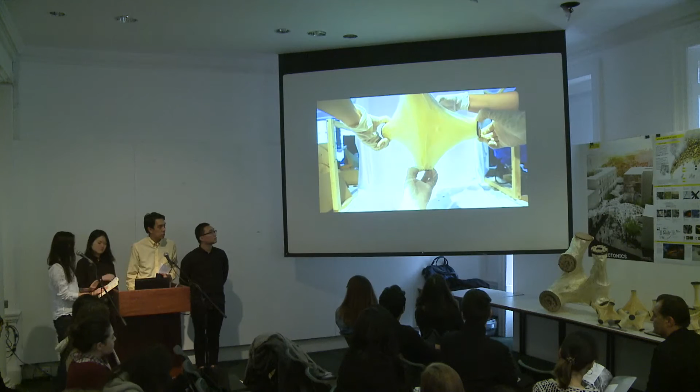In terms of the material being the design driver, we applied the material into methods for generating design through dynamic relaxation for form finding. Next, we populate the particles on the form to distribute the nodes and the positions for the connection points, resulting in a network topology.

As a thesis, how we position our research is to speculate, activate, and reinterface a prototypical urban site. The main components of the research are a rapidly deployed automated robotic production process, with the material having the properties of a performative, lightweight, and adaptable material system.

So the design process, we are also challenging the notion of translation from the digital to fabrication, whereby the input for the geometries is implicit in the material formation. Therefore, the description of the geometries of the form is directly encoded into the material.

So on the automated manufacturing process, we are employing industrial robots for the production of the material due to its high precision, its time-based formative process, and the on-site assembly process. We are making a statement of the design being in the domain of the designer, and the production being in the domain of automated manufacturing.

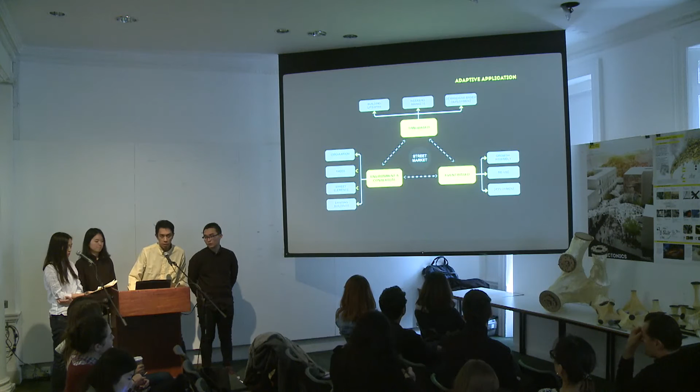manufacturing and deployment. In terms of time-based, the growth speculation of the system is integrated into the building lifespan, whereby the project is not considered a highly permanent structure, but it can be adapted to use and events.

In terms of research, historically, industrial production is driven mainly for efficiency and cost. So the historical basis for industrial production results in highly standardized production components, which results in highly standardized products.

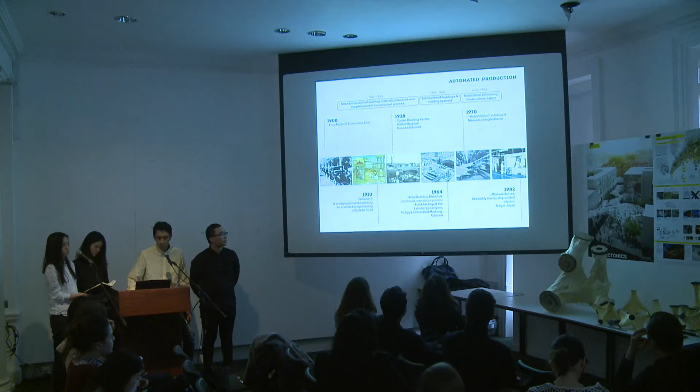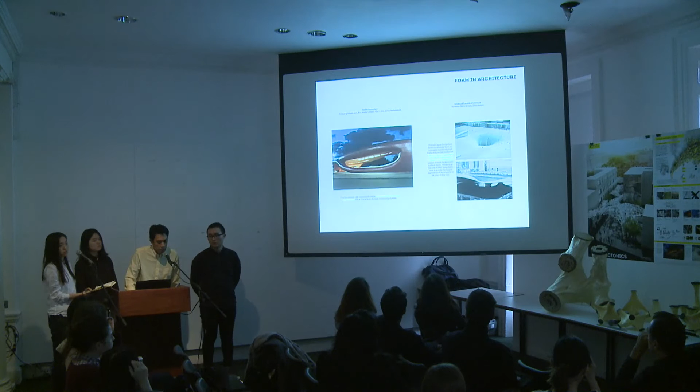Excuse me. Our research is based on Marjan Colletti's research work on foam tectonics, which we project our material processes and speculation on his research.

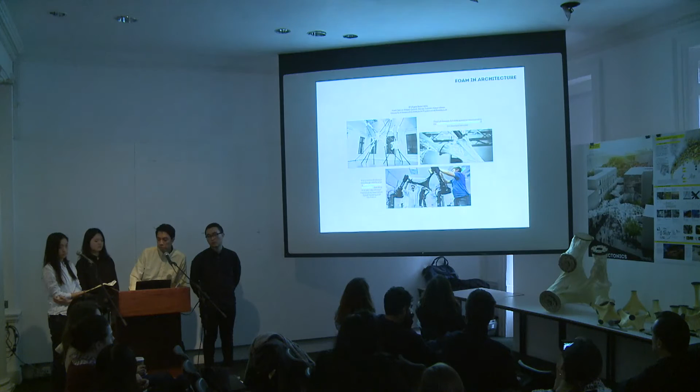So the main differences between Marjan Colletti's work and our work is we decided to pursue it further in terms of the nodal configurations in a tectonic network of structure.

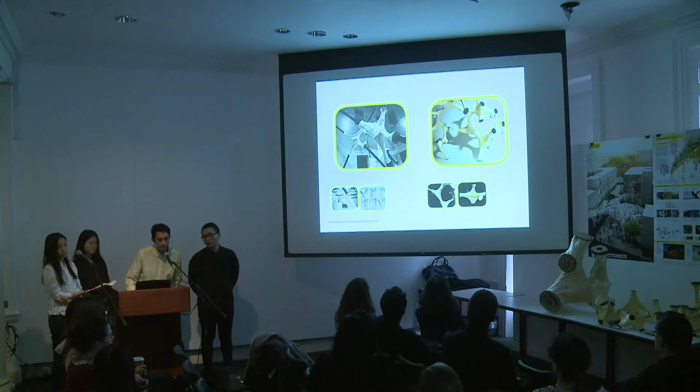Space grids and nodes are mainly used to increase the performative aspects of the structure, whereby because of the complexity of the production of the nodes, the nodes are highly standardized in the production of the components.

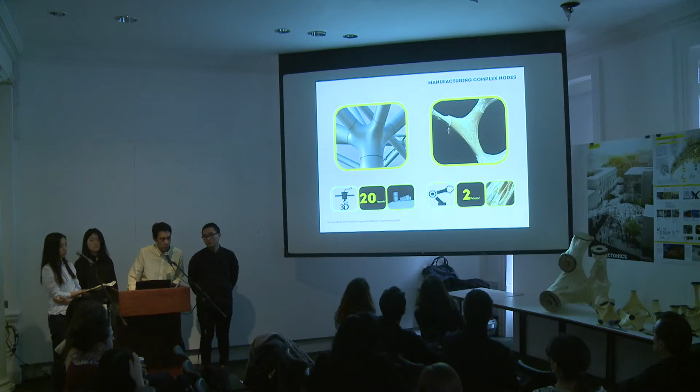This is a comparison of a production process for a complex node, whereby on the left side you can see a 3D printed node, which takes 20 hours to produce one component, compared to our material system which would take 2 hours to produce.

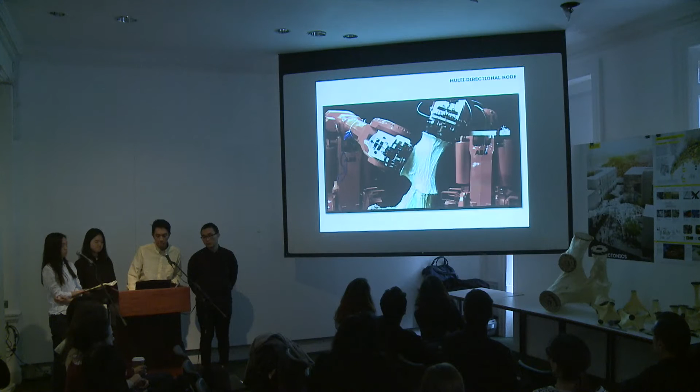This is the disadvantage. The advantage from our material is based on the phase-changing material, and it can be rapidly constructed with single elements, and it can be easily applied with the robot to produce the multi-direction node to work in a more efficient structure system. It also reduces the time and cost based on the robot production, and it works well for compression and tensile structures, creating a self-supporting structure network.

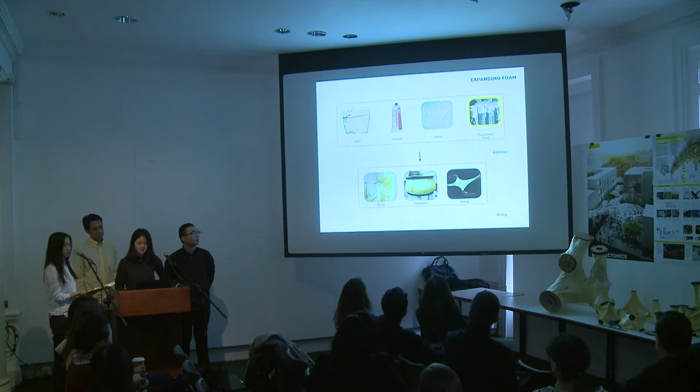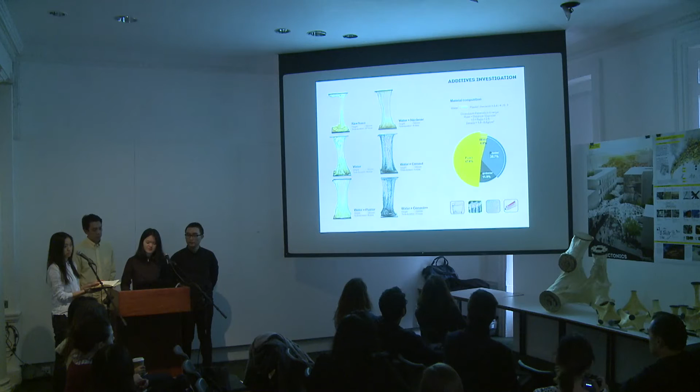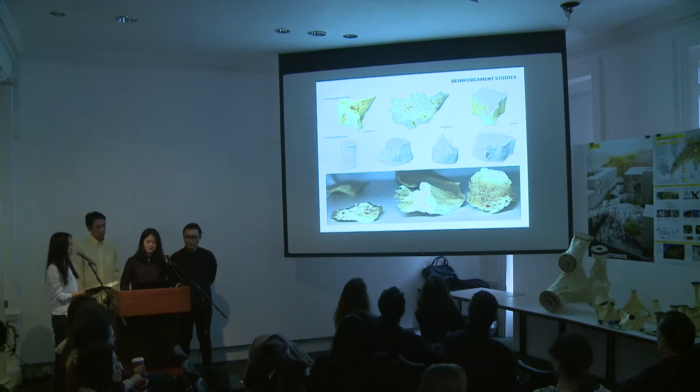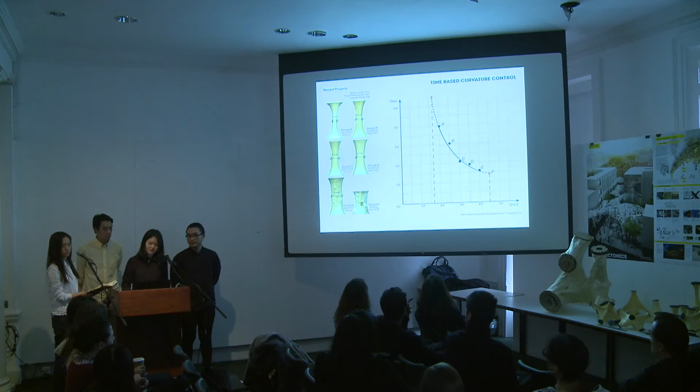It makes it stronger. This shows how time influences our material behavior. The most interesting thing we found for our material system is time-based behavior. This is the same amount of material pulled to the same height - the longer the rest time, the more strength we need to pull it. We can also get different curvatures of the elements, which we can input into our system.

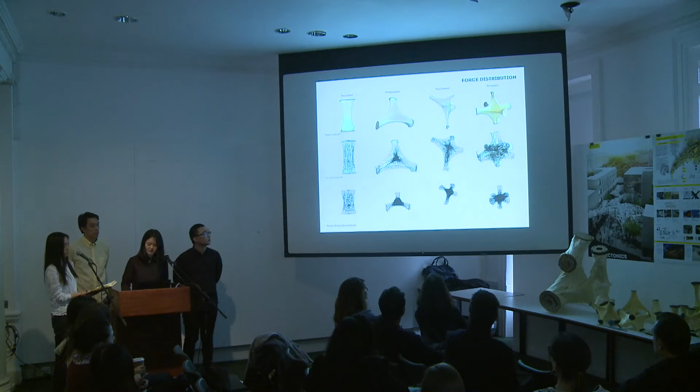These are some force distribution analyses we made for our elements. From this analysis, we can tell the more plates it's pulling, the more evenly the force distributes. These are the node reconstructions which help us calculate the material amount.

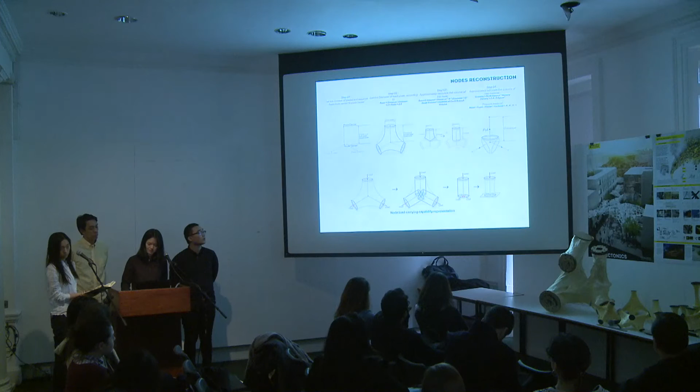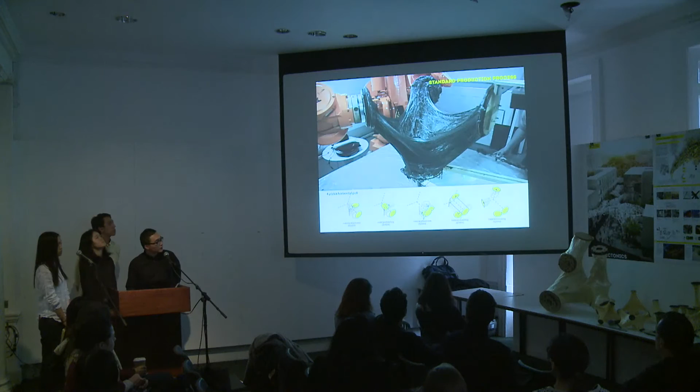So if it's too early, the material starts falling - this is a failure test. We assume that if we have more robots, we can do multi-direction pulling at the same time during the robot collaboration.

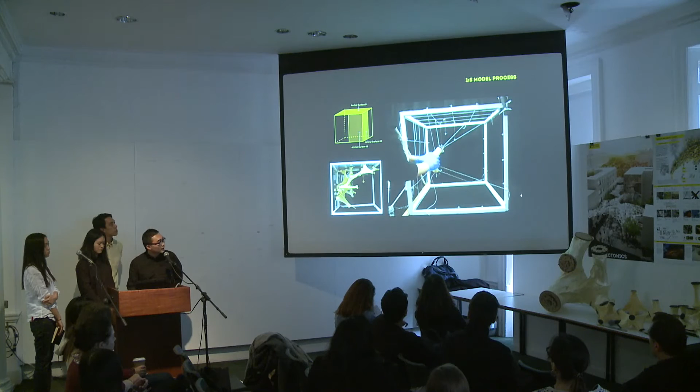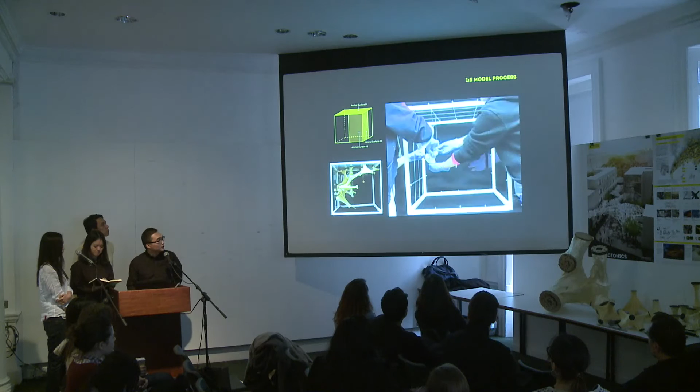This is our first step to manually figure out the production process. After pulling each element, we cut the plates, then wait for it to dry, put the material on the cutting section, and pull the next multi-direction nodes.

Following the material connecting to material, we manually control the geometry curve. This is the first time we figured out the scale of our elements with the space created by the models.

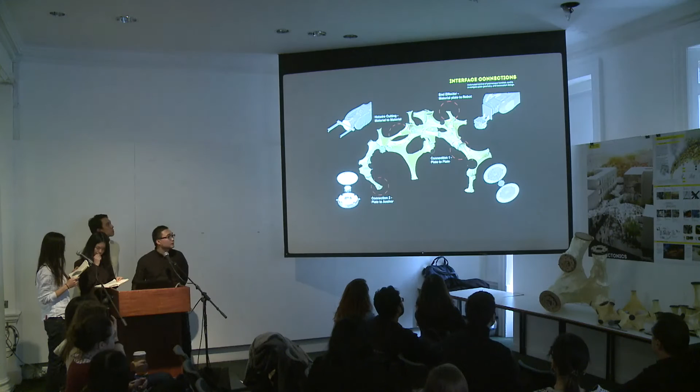For the connections of the material, there are 4 conditions: 2 are end effectors interfacing with the material plates, and 2 are anchor conditions - one on the surface and one from plate to plate. The plate-to-plate connection allows us to segment the components into assembly parts.

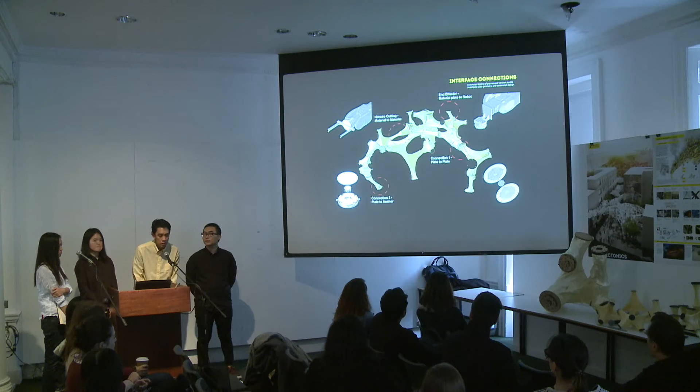This is an iteration of the end effectors, version 4. Various studies were made on the connectivity because of the goal of minimal actuation and simplified force distribution to carry out the process.

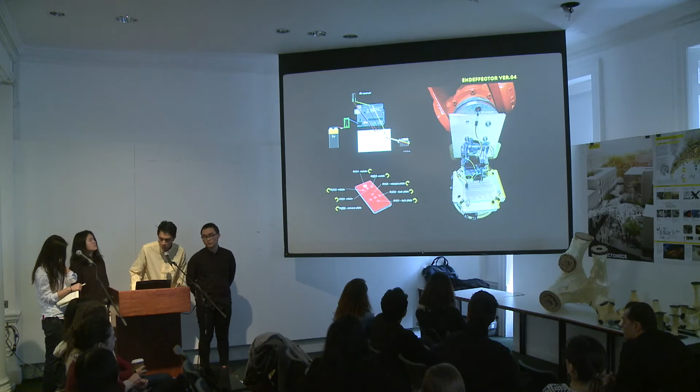This is the exploded view of the final end effector, which we used for the one-to-one prototype at RoboFold. The communication is handled by IR infrared remote control to actuate the gripping process of the material plate.

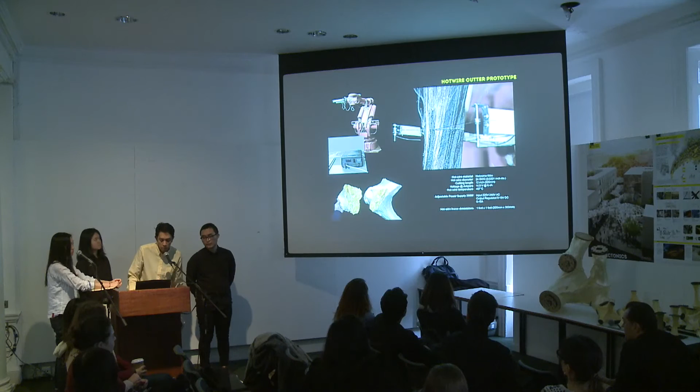For the hot wire, this is needed to accurately control the cutting locations of the material to enable material continuity and material fusion for the next element.

This is the one-to-one production of the prototype. The material burns, therefore a lot of smoke was produced. Therefore, we are arguing for a contained production cell for the robotics, and for lights-out manufacturing, whereby no humans are involved.

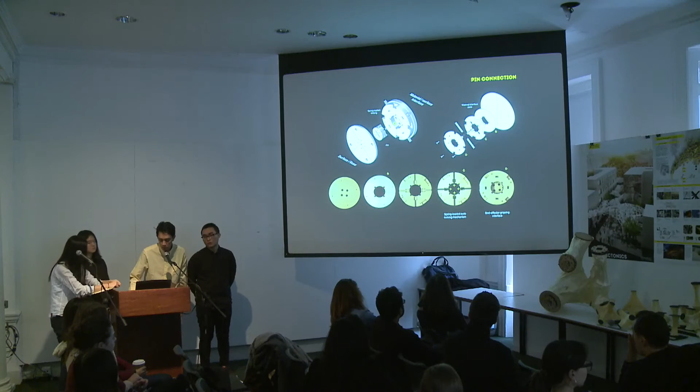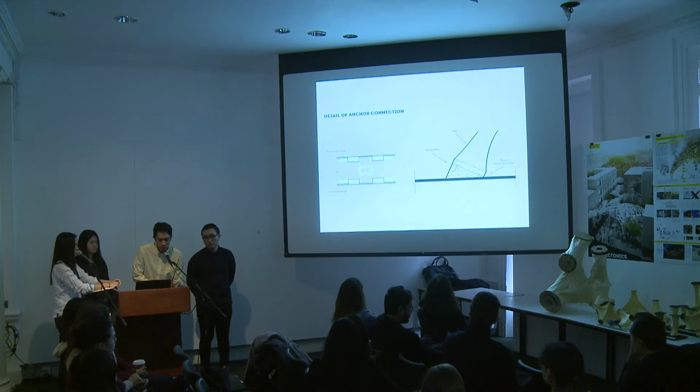This is a detail of the anchor connection at the surface. This can be applied on a vertical surface such as a wall or a horizontal surface on the ground.

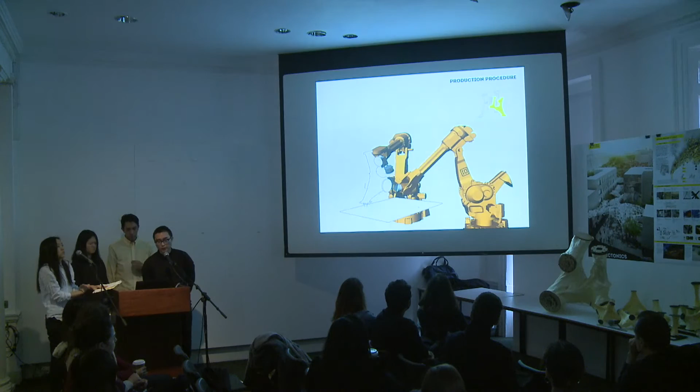This is the production procedure for the one-to-one prototype. We are trying to add complexity of the path during the material distribution to make it as automated as it can be. And then we do the cutting automated, collecting and placing automated, and pulling automated.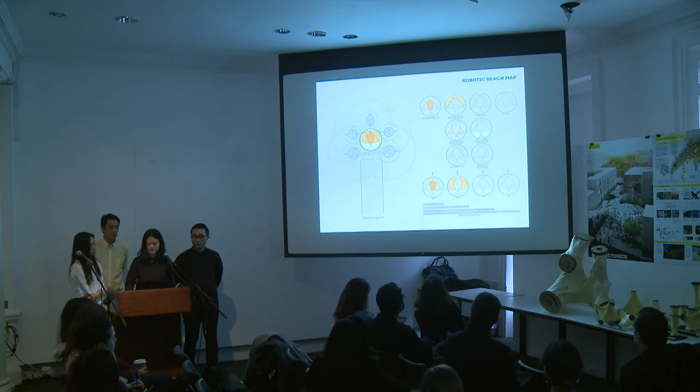This is some robotic configuration we did to figure out the robot's reach map. We found that to increase the efficiency of the robots, we can distribute different jobs on the same level because we have different numbers of plates and pulling nodes.

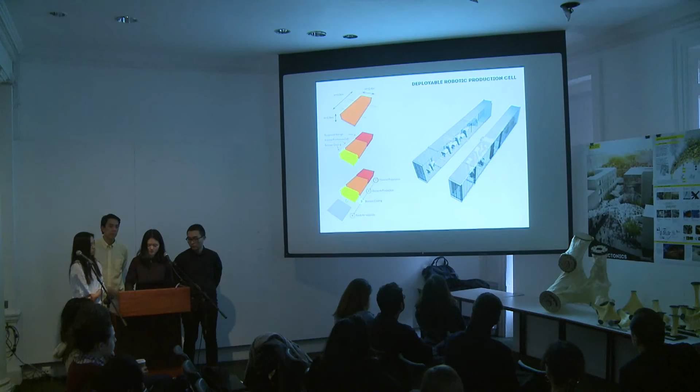This is from a container to a robot cell. One container can be separated into 3 parts: one is equipment storage, then the main part of the robotic production cell, and then the bioresin coating room. Then it will deliver to be assembled.

From our material system, our elements give certain limitations, such as angles and size. The angle between 2 branches has a reasonable range, which is within 60 degrees to 150 degrees. If the angle is too small, the fibers between 2 plates cannot be stretched fully, so it cannot give us a very natural curve.

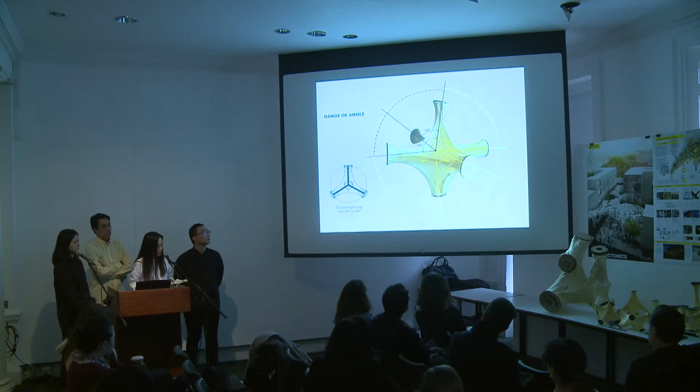Based on the angle limitations, we know when we use the maximal angle branches, we can get our maximal span geometrically. With this, the curvature is the maximal curvature we can get.

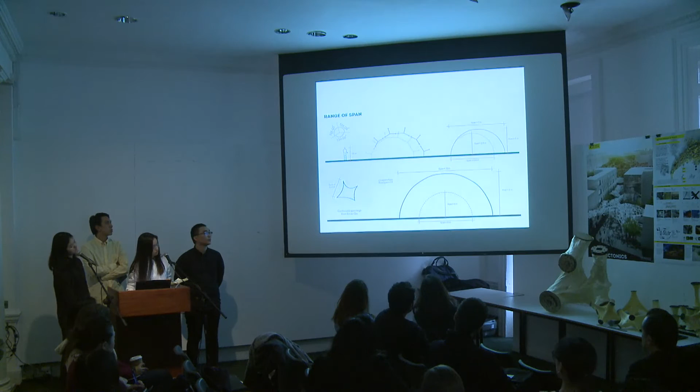Based on the experiment of our material, we know that our material is both good at compression and tension. So we use dynamic relaxation as our general form-finding method. There are all catalogs about the different set conditions.

Compared to the normal modular component system, our branches, our components, are fully differentiated. So they are based on a natural curve. They are very easy to close loops.

So these are diagrams to show different loops coming from different combinations of components. The diagrams show we introduce Voronoi logic as our method to generate our branch system, because when we populate different points, it can give us different latticing networks.

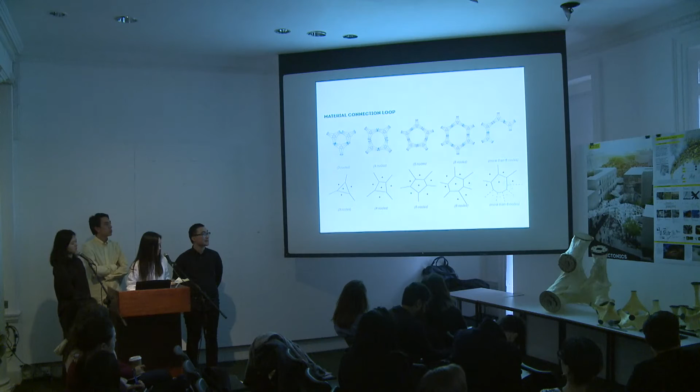Because the Voronoi can generate some very short edges, we set our rule to merge two short vertices.

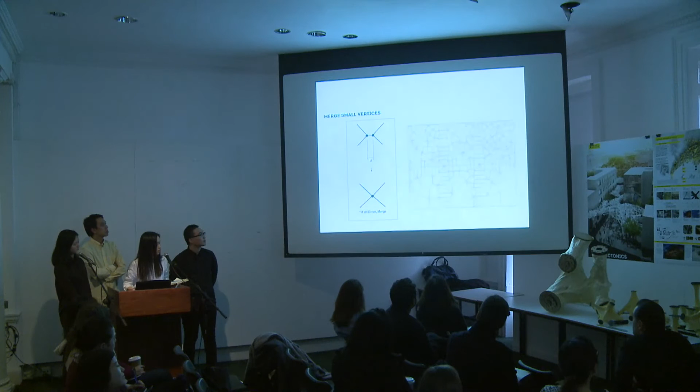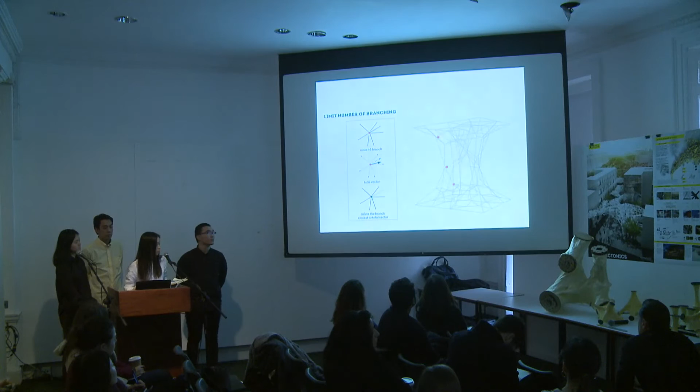From our material system, we know that the maximal number of branches is 6. This video shows how the system will try to merge the node where the branches are more than 6.

Based on the natural curvature, we define 2 kinds of curvature, which are positive and negative. For the positive curvature, we have some extra branches pop up, so we can suspend some extra external surface or membrane.

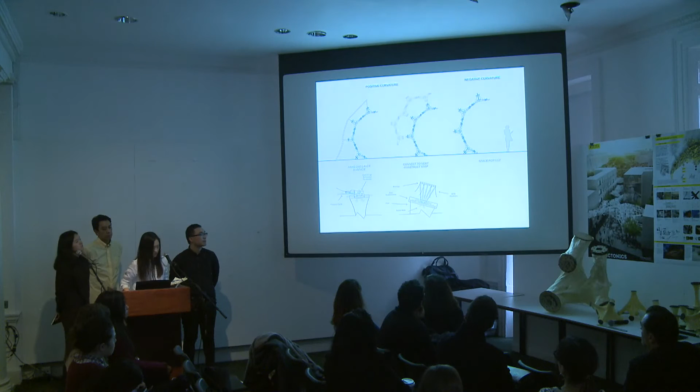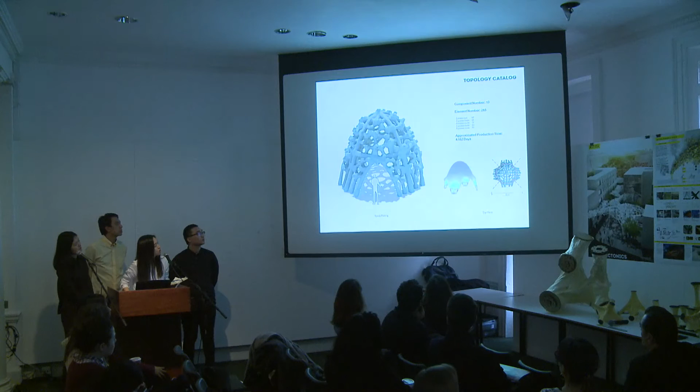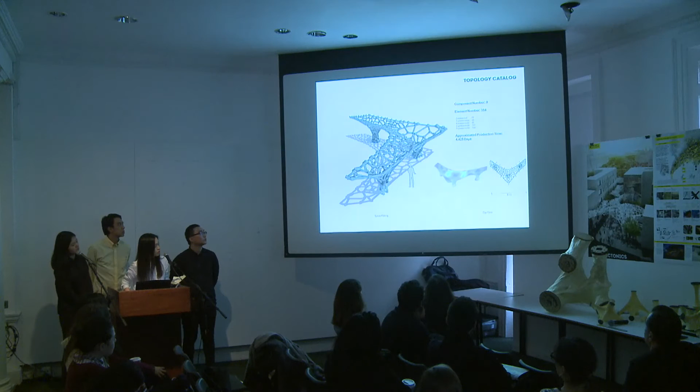These are all catalogs based on the dynamic relaxation. They also show the component number and the production time the robot cell should make.

So we applied this system into various street conditions to highlight the adaptability to different contexts. This is the street conditions. This is a type of spaces, and we are based on symmetrical conditions.

The material system is able to adapt itself to various conditions, and at the same time being able to be highly differentiated in terms of the element geometries.

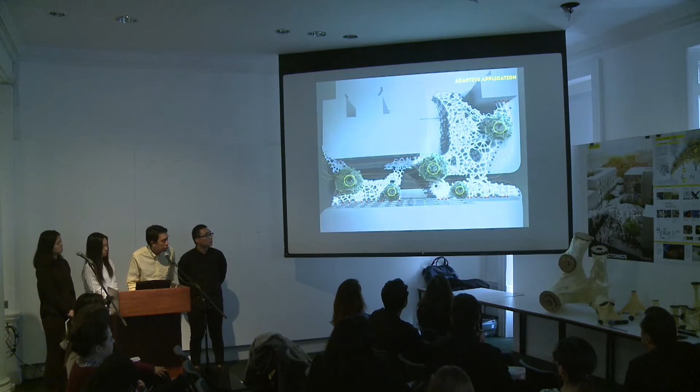This is the scenario that we are highlighting our design project on. The yellow is to avoid contextual elements such as trees, buildings, and circulation paths.

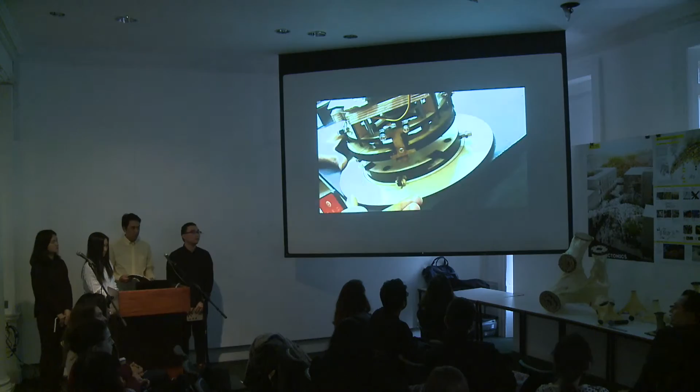Can I ask you a question? What has been clear to me, I love the project, all the research, and also the results seem very convincing.

First of all, congratulations. I really love the research and its various steps and aspects leading to a convincing application suggestion. But my question is simply, what wasn't clear to me is you start with pulling off the actuation plates, and they become part of the structure in the end, or the whole or part of it, I guess. And I think that needs to be clarified to some extent, that double functionality.

But then you have two ways of connecting. You have the way of material to material connecting, and the way of leaving it with the actuation component. I would understand it in terms of permanent and temporary construction, but it seems you're mixing that in the model. Is that just here in the model, or what would that be? What motivates that potential mixture of these types of connections?

Ideally, we would prefer a homogeneous connection so as to ensure material fusion throughout the system. But we discovered that to close the loop, it's not possible to continue cutting and pulling from the cut plates. We also considered the assembly aspects of the project, therefore segmenting the different components for assembly and the production cell constraints as well.

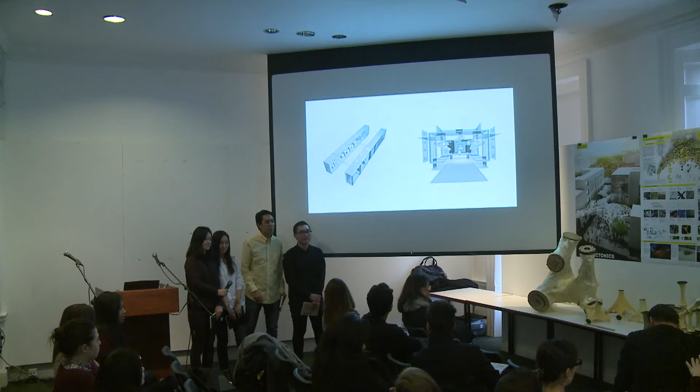I'm going to follow up a little bit on Patrick's comment. I think for me the biggest confusion that I still have -- I think there are many interesting things that have happened in the project, at least since I last saw it. But the confusion is this.

On the one hand, you seem to suggest, and maybe I got it wrong, that the material is phase changing and that there would be a possibility to reuse this material. You seem to be suggesting that at some points. Then when you go into, we will coat it with resin, the question of reuse of material begins to become a bit of a question mark. And with the issue of leaving the end effectors in the material, of course the question of how you would ever separate the foam from the end effectors is still there, very present.

So with this, what Patrick was saying about a permanent construction versus a temporal construction, this is really where the project, to me, is more ambiguous. In the sense that you seem to be claiming a very fast type of construction system that also has the potential to be reused, but then everything you explain in many ways seems to be locking things in place. When Patrick says, but what if we were talking about a permanent construction, that the robots could be there directly on site, pulling from the nodes that have already been built, and basically what you facilitate, as opposed to a standardized kind of production, is that you make it happen while it's being built.

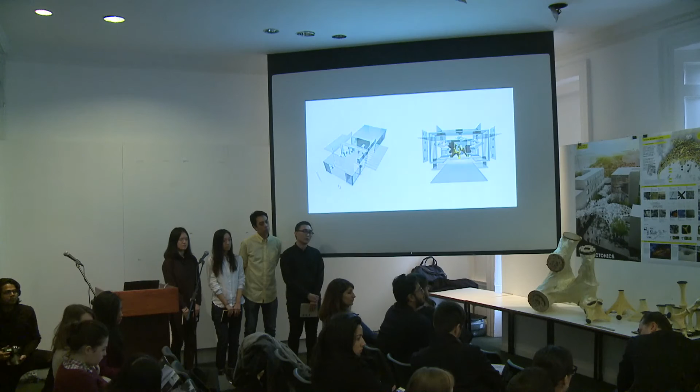And then you say, no, that's not what we are doing here. So this is, I think, where the ambiguity comes in. And it would be interesting if you could clarify these two projects, because both have a lot of potential, but they cannot be mixed. So when you do material-to-material connection, that is with the intention of reusing the material. But when you leave the end effectors, maybe that's a more permanent kind of construction where you pull directly on the building site. But I think the two mixed is what creates a lot of ambiguity, at least from my perspective.

I agree with what's been said before. I think there are a lot of positives in this project, but there are holes in it as well. Some aspects, like the application of a resin after production, aren't really in keeping with the general processes you've got - you should have looked more at the additive approach and what that did for you.

The influence of temporary construction versus permanent construction is one thing, but also the construction process with these end connections - they don't look like connections that people can actually get in and fix. The actual process of construction is missing a few bits, which potentially will push it away from being something that anyone can buy and do.

So if you are looking for something that anyone can buy and do, then you need to have a system that anyone can understand. If you are looking for something that can be installed by robots or by professionals, then you can have a system that's more appropriate to that.

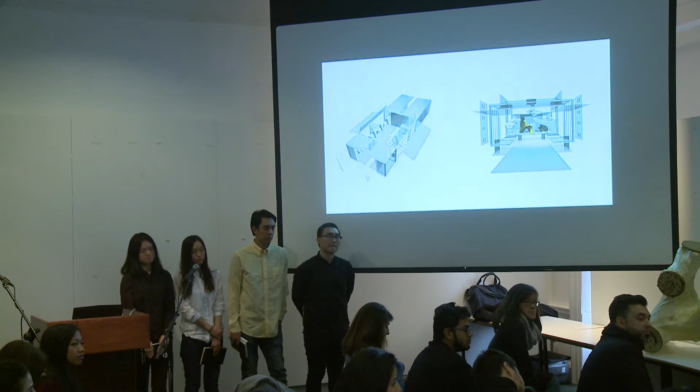So these must get into bending. They operate in bending, I suspect, at points, particularly if you have dynamic loads on these, because they're not a complete surface. They're never triangulated. So I think that moment strength or bending strength is activated in the system.

But it doesn't need to be everywhere. I mean, I think this could have been further explored because a plate-to-plate connection might still be a hinge point, a light, simple connection, because each node is internally strong. One could look at various structural systems. I mean, that discourse needs a bit further, as well as a scaling discourse, which I believe is viable because of composite inherently. It mimics a kind of composite shell construction in the node.

But yeah, I think that whole structural discourse is vital, but was part of the debate as far as I think Philip's point is an important one, because what this potentially could be is deployed with different kinds of plate conditions, developing different kinds of resolutions, because the material itself is really given definition through these kinds of continuous, almost delaminations. So I think it's important to speculate in terms of how this can be fully functioning and fleshed out as a lattice strategy, and really take on board a lot of the foam aspects of this thing.

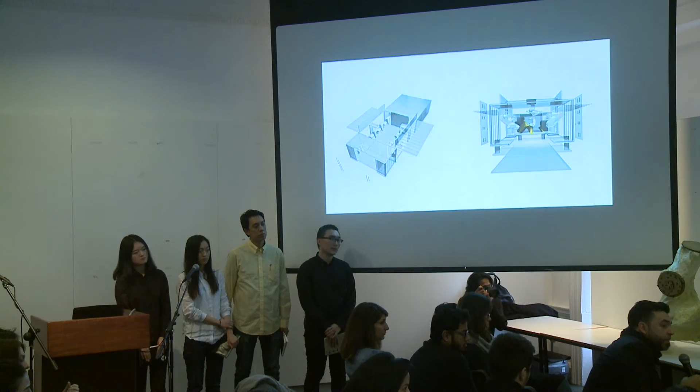Because the isotropic aspect of it allows it, I think, potentially to think, like Jason was mentioning, in terms of end effectors, where the project is less robot and more end effector kind of deployment. And the surface strategies, I think, just the same way on a micro scale you can make a sandwich panel, you could develop different kinds of categories of stiffness, where pliancy is something of great value in some aspects, particularly with interiors and so forth. And then one can actually start to think about this beyond the surface topology of a generic shell deployment, but something that is actually really speculating on how these processes could work with different scales of operation.

I think they tried to deploy it in one scale, in one sense, to be coherent, but at some level I think that open experimentation should start to come back, because primarily all of these nodes, the most exciting aspect of it is the fact that directionality doesn't really have a bias in a traditional way like other materials. So giving legibility to that, I think, is a design driver. It's not coming from the material, it's just a speculation where the material could actually find its form beyond the kind of relaxation and the optimization strategies.

There should be a second microphone.

Sorry, just maybe something that came up, which perhaps hasn't been talked about, is that I think it's also a great flexible system to deal with tolerances, and to just accept that. Probably that was discussed in previous reviews. But to add one more structural thing, just for you guys to trigger as an input, perhaps you continue with this. I know you're at the end of a long DRL intensive period, but still, what one also notices in the models is that they have some flexibility.

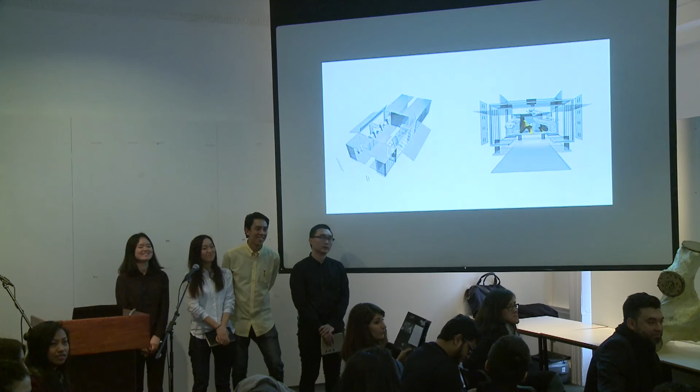That brought me to the question, what is the inherent function of the material actually? And of course, it's about insulation, not about structure - we all know that. But then I was thinking about how this plate is actually defining what job the material will do.

So I was wondering, how can that interface that sits around here - and I'm sitting in front of that kind of almost Greek column there - if the plate, the parameter of your system, changes, how can the result be a different one? And I'm thinking, if it's insulation, why don't we think of rectangular input parameters, these plates that turn this material into walls and do the job the material actually does? Just some ideas that popped up in my head.